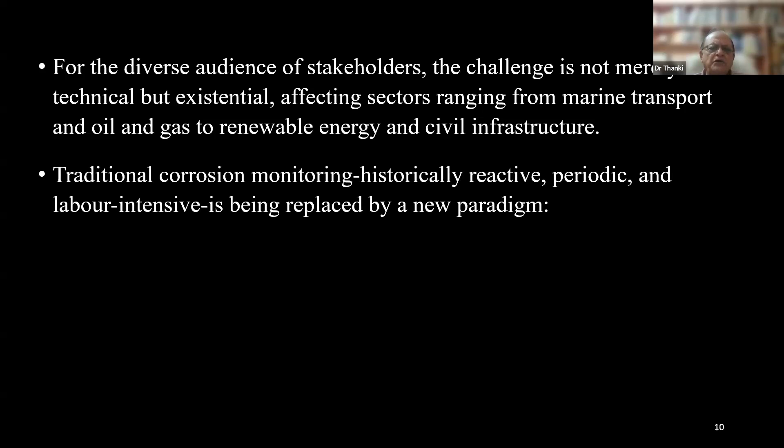The global industrial complex is currently undergoing a structural transformation in asset management, driven by the unsustainable economic and environmental cost of material degradation. Corrosion, often characterized as a silent destroyer of infrastructures, accounts for an estimated $2.5 trillion in annual economic losses globally, representing approximately 3.4% of global gross domestic product. For the diverse audience of stakeholders, the challenge is not merely technical but existential, affecting sectors ranging from marine transport and oil and gas to renewable energy and civil infrastructure. Traditional corrosion monitoring, historically reactive, periodic, and labor intensive, is being replaced by a new paradigm: predictive corrosion resilience.

This approach leverages the current convergence of high fidelity digital twins, DT, and artificial intelligence, AI, to synchronize the physical state of an asset with a virtual counterpart, enabling proactive intervention before catastrophic failures occur.

The global economic and environmental imperative: the financial burden of corrosion translates into maintenance budgets, impacting national security and global sustainability goals. Research conducted by the Association for Materials Protection and Performance indicates that between 15 and 35% of corrosion cost, equating to as much as $875 billion annually, are preventable through the application of currently available and emerging corrosion control practices.

In high stakes environments such as the Gulf of Mexico, equipment failures due to corrosion represent an annual cost of approximately $2 billion. For water infrastructures in North America, corrosion contributes to over 260,000 pipe failures annually, adding $2.6 billion in repair costs to municipal budgets.

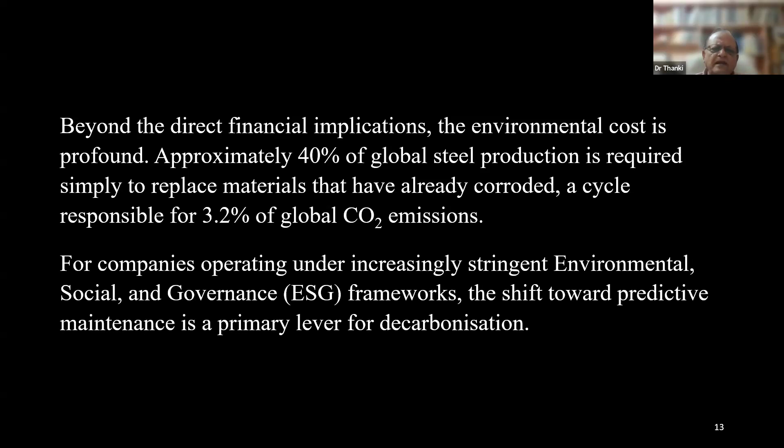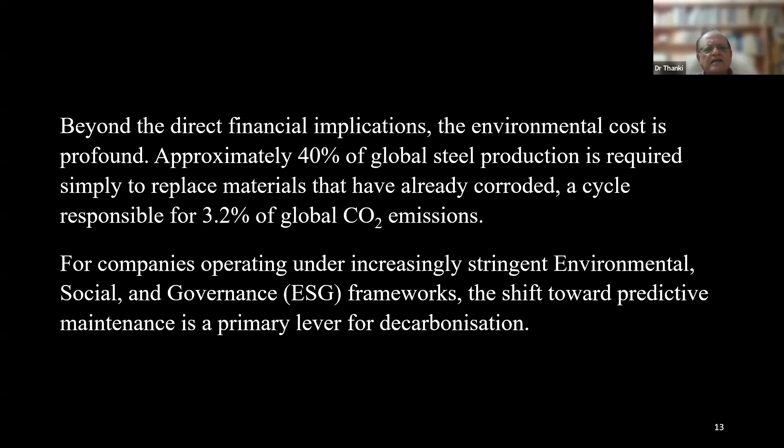Beyond the direct financial implications, the environmental cost is profound. Approximately 40% of global steel production is required simply to replace materials that have already corroded, a cycle responsible for 3.2% of global CO2 emissions. For companies operating under increasingly stringent Environmental, Social, and Governance (ESG) frameworks, the shift toward predictive maintenance is a primary lever for decarbonization.

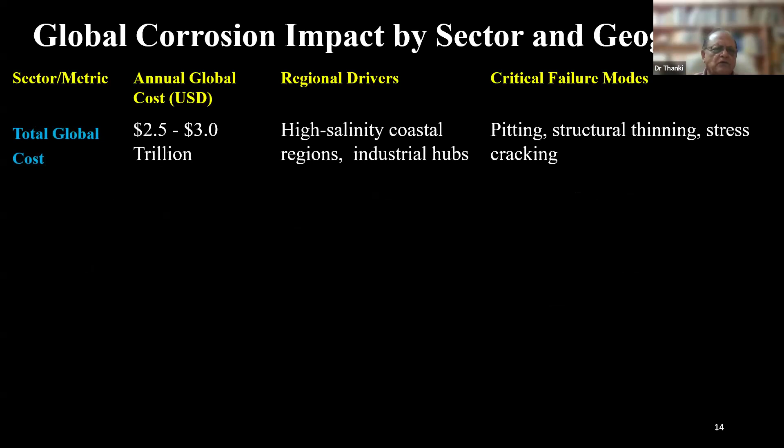Now I've tried to give you one tabulation on this global corrosion impact by sector and geography. We'll be making the table with sector, annual global cost, regional drivers, and critical failure modes. Total global cost: 2.5 to 3 trillion dollars. Regional drivers are high salinity coastal regions and industrial hubs, with characteristics like pitting, structure thinning, and stress cracking. This shows the critical failure modes by sector.

Oil and gas: 1.37 billion direct, Middle East with 32.5% market share, and Gulf of Mexico. The failure modes are sweet CO2, sour H2S, and microbial MIC.

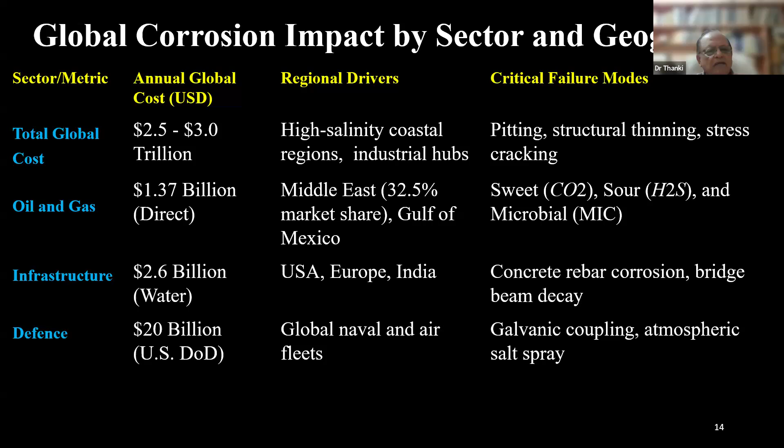Infrastructure: 2.6 billion through water alone. Regional drivers are USA, Europe, and India, with concrete rebar corrosion and bridge beam decay. Defense: 20 billion US dollars by US DoD, covering global naval and air fleets, with critical failure modes including galvanic coupling and atmospheric salt spray. Environmentally, this represents 3.2% of global carbon dioxide through the global steel replacement cycle, early coating failure, and leak-induced spills.

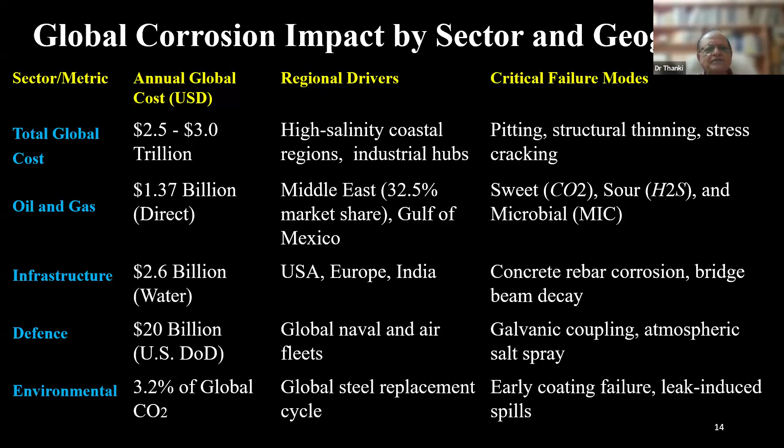Let us see the strategic roadmap to predictive resilience, how it works. The transition from a no-twin state to a fully autonomous, self-healing infrastructure requires a structured progression through levels of technological and organizational maturity. This roadmap provides a framework for organizations to evaluate their current standing and plan for a phased integration of AI and digital twin technologies.

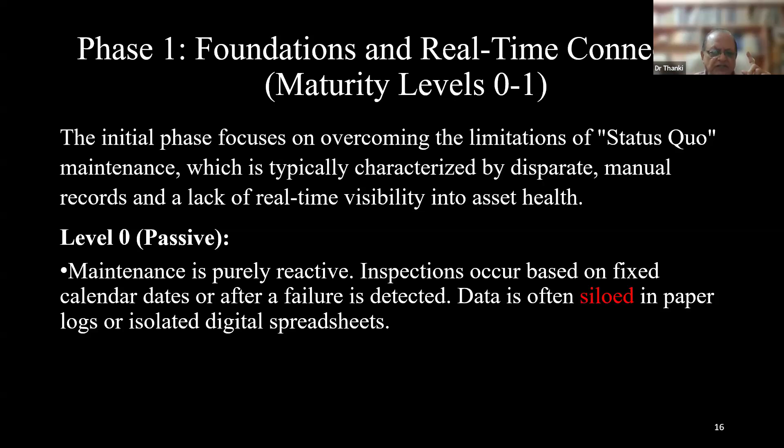Let us start with level 0, that is passive. Maintenance is purely reactive; inspections occur based on fixed calendar dates or after a failure is detected. Data is often siloed in paper logs or isolated digital spreadsheets. Level 1 is startup: organizations begin the twin transition by deploying Internet of Things sensors. This level focuses on real-time data capture and basic visualization.

Operators gain a dashboard view of parameters like pressure, temperature, and current wall thickness, but analytics are limited to simple threshold alerts.

Phase 2, contextualization and prediction. That is what we call maturity level 2 and 3. In the second phase, the digital twin evolves from a simple monitoring tool into a sophisticated forecasting engine by integrating historical context and advanced physics-based models.

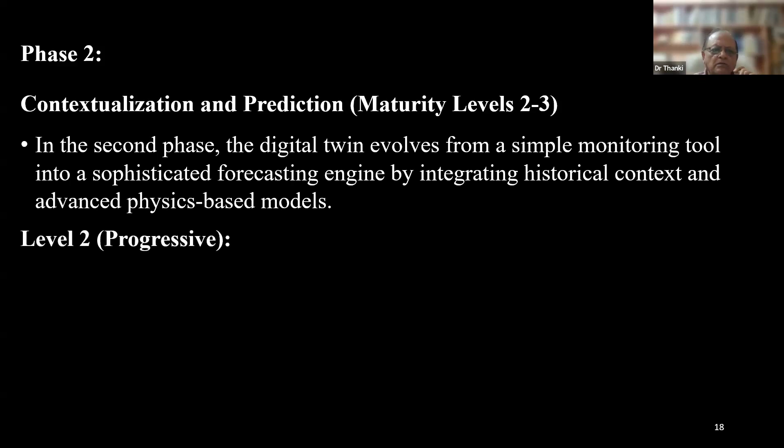Level 2 is progressive. The twin incorporates historical inspection records and normative benchmarking. By comparing current sensor data to years of maintenance history, the system can identify deviations from the normal degradation curves.

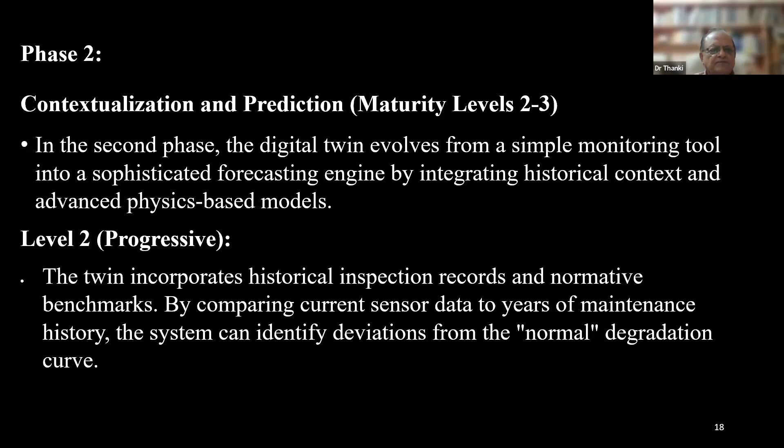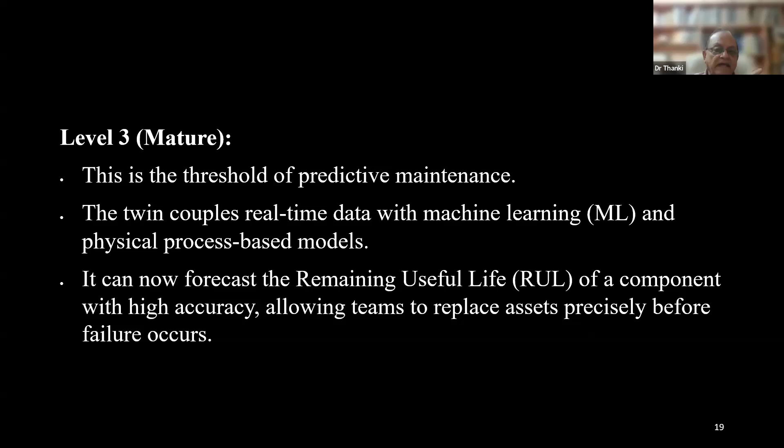Level 3, this is the threshold of predictive maintenance. The twin couples real-time data with machine learning and physical process-based models. It can now forecast the remaining useful life, RUL, of a component with high accuracy, allowing teams to replace assets precisely before failure occurs.

Phase 3, optimization and autonomy, maturity level 4 and 5. The final phase leverages the full power of AI, not only to predict the future, but also to optimize operations and maintenance strategies actively. Then comes level 4, optimization.

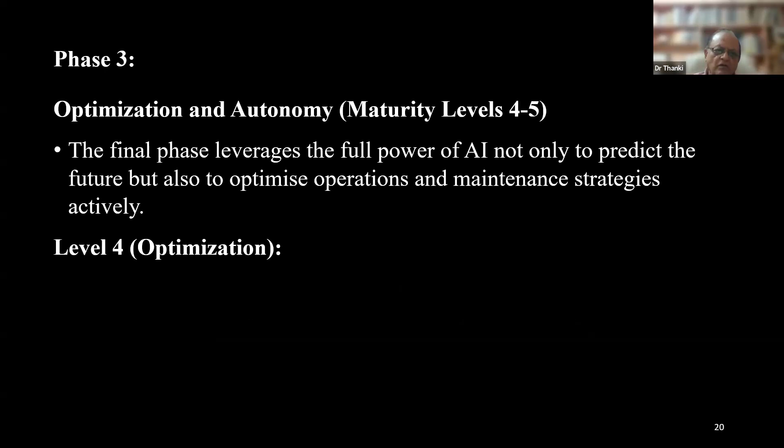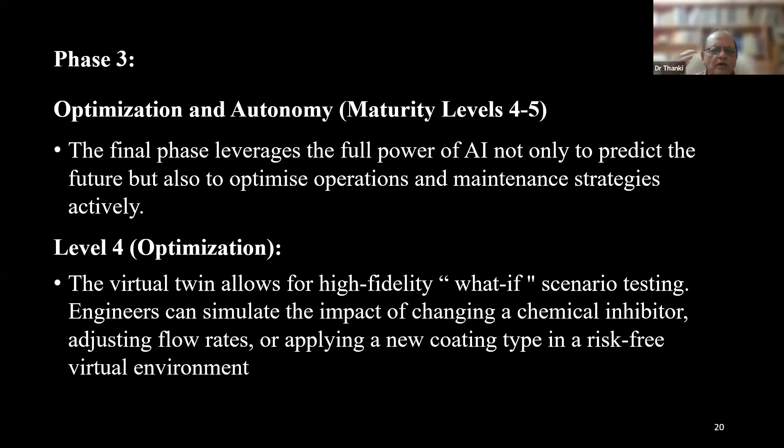The virtual twin allows for high fidelity what-if scenario testing. Engineers can simulate the impact of changing chemical inhibitors, adjusting flow rates, or applying a new coating type in a risk-free virtual environment.

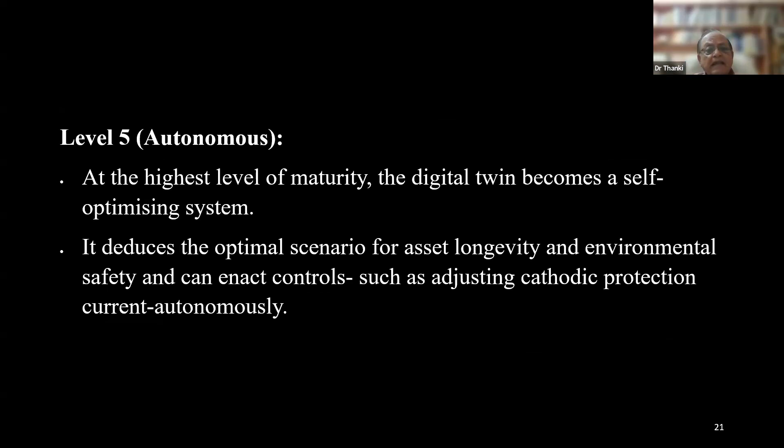And level 5, we are reaching autonomous. At the highest level of maturity, the digital twin becomes a self-optimizing system. It deduces the optimal scenario for asset longevity and environmental safety, and can enact controls such as adjusting cathodic protection current autonomously.

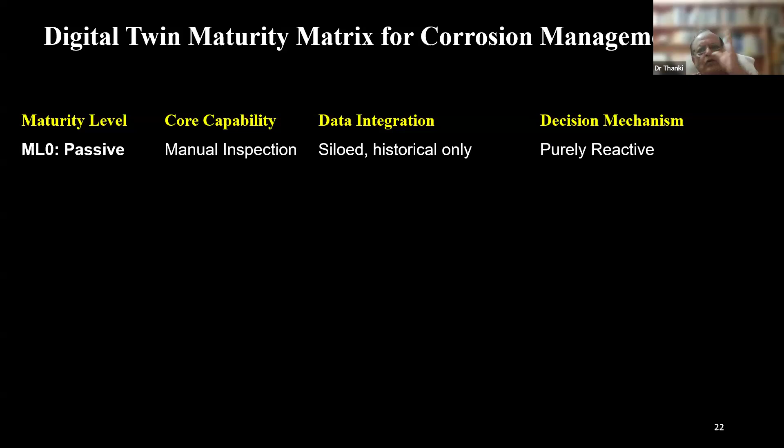Let us have the overview of all the systems. ML0, passive, manual inspection, siloed, historical only. It's a purely reactive one. Then we raise to number 1, the starter: real-time monitoring, IoT sensor streams, descriptive and alert-based.

The third, progressive, has historical context along with it. Data integration comes with IoT plus past maintenance logs and history. Then the decision mechanism is diagnostic and trend analysis.

Then comes the maturity level: predictive forecasting, multi-modal data plus AI models, and prognostic and RUL calculation. Optimized scenario simulation: virtual what-ifs testing and prescriptive optimization. And then last comes master: autonomous action, closed loop self-correction, and AI-driven direct control.

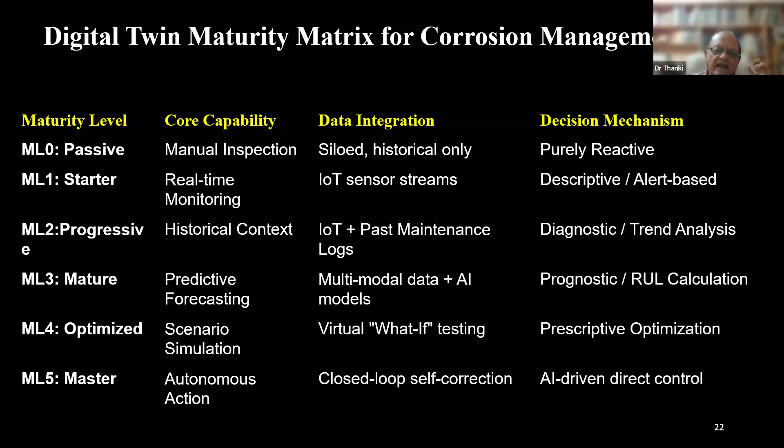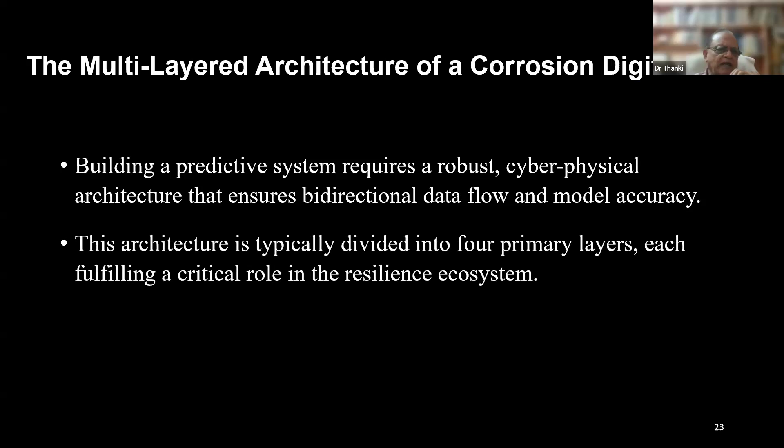Building a predictive system requires a robust cyber-physical architecture that ensures bi-directional data flow and model accuracy. This architecture is typically divided into 4 primary layers, each fulfilling a critical role in the resilience ecosystem. The physical asset and sensor layer.

The foundation is the physical infrastructure, whether it be a section of a subsea pipeline, a wind turbine tower, or a coastal bridge. This layer is embedded with diverse sensors that act as the eyes and ears of the system.

Then comes the corrosion coupon, physical metal strips inserted into the environment that mimic the asset's material, providing ground truth calibration for the digital models.

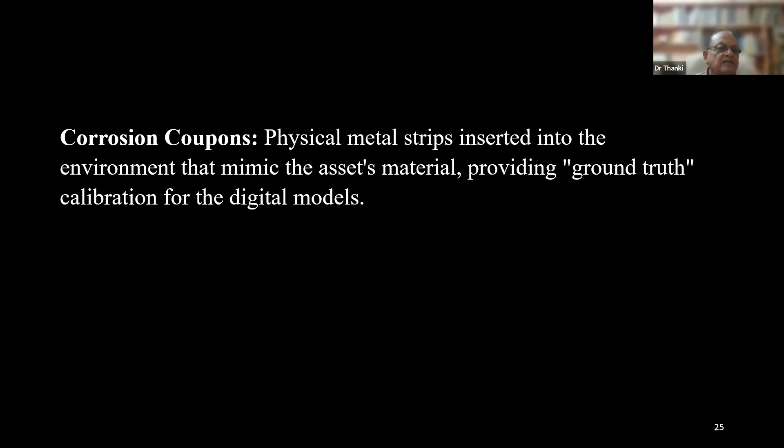Environment sensors track ambient conditions such as humidity, temperature, pH, and the concentration of corrosive species like chlorides or hydrogen sulfide.

Now let us come back again to DAML. The DAML acts as the bridge between the physical and virtual world. It handles the transmission, processing, and organization of vast amounts of data generated by the sensor layer. Key challenges in this layer include managing data quality, ensuring timely transmission over network infrastructure, and implementing security protocols to protect critical infrastructure data from cyber threats.

The multi-model AI and simulation layer. This is the computational engine of the digital twin. It integrates ultra high fidelity simulation models with data-driven AI algorithms to mirror the structural behavior of the asset.

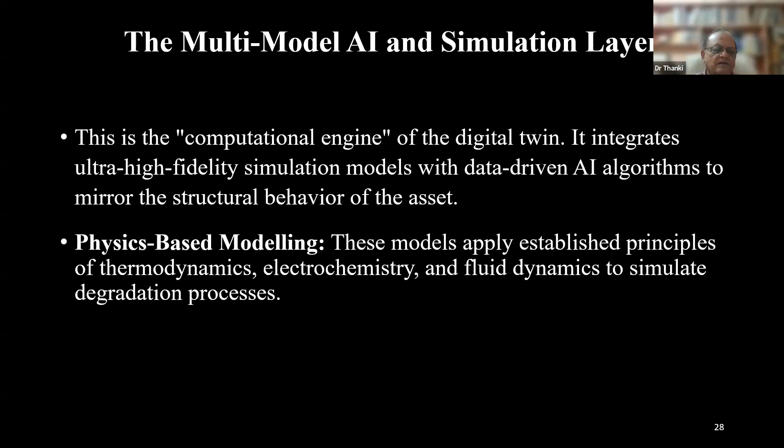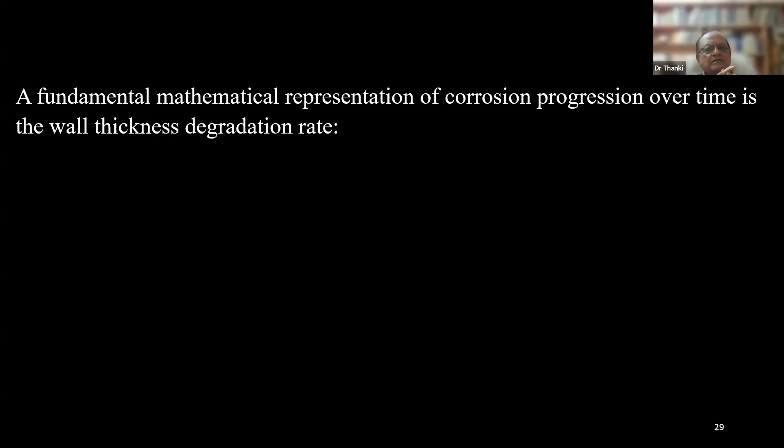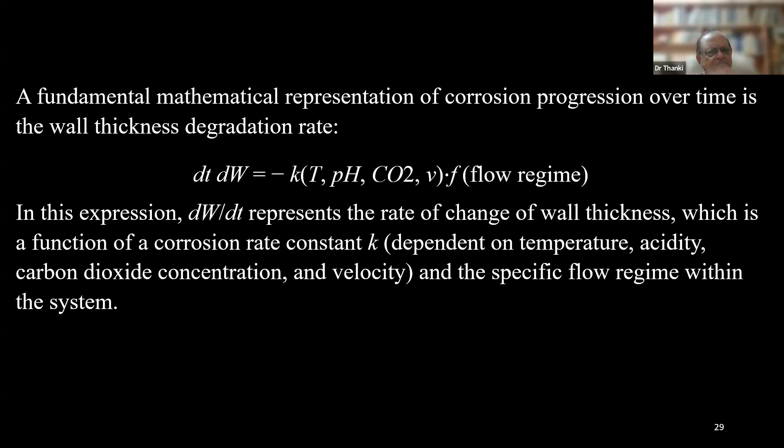Physics-based modeling: these models apply established principles of thermodynamics, electrochemistry, and fluid dynamics to simulate degradation processes. A fundamental mathematical representation of corrosion progression over time is the wall thickness degradation rate. For example, this is the way we can consider it: dW by dt represents the rate of change of wall thickness, which is a function of the corrosion rate constant K, depending on temperature, acidity, carbon dioxide concentration, velocity, etc., and the specific flow regime within the system.

Now let us see how the AI and machine learning modality comes into play. AI complements physics models by identifying non-linear patterns and anomalies in complex datasets that theoretical equations might fail to capture.

Let us look at computer vision. Algorithms like YOLO, known as you only look once, or CNNs, convolutional neural networks, are used to analyze drone and robotic imagery for rust detection, pitting identification, and coating degradation, often achieving over 90% accuracy in defect localization. It's a wonderful thing.

Time series forecasting. Recurrent neural networks, known as RNNs, and long short-term memory networks are employed to predict future corrosion rates based on historical environmental fluctuations.

Let us break this down in everyday language. The problem, for example, is we want to predict how fast metal will corrode or rust in the future. Rusting depends on things like temperature, humidity, and pollution levels, which change over time. The idea is if we look at past environment data, like yesterday's humidity, last week's temperature, last month's rainfall, we might spot patterns, and those patterns can help us guess what the corrosion rate will be tomorrow or next year.

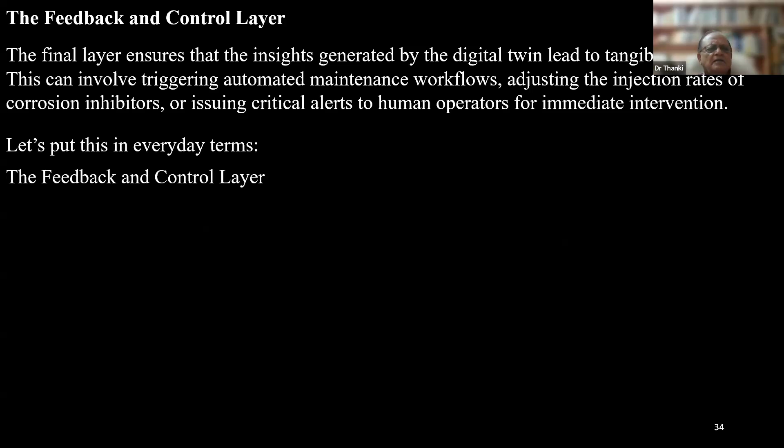Think of the digital twin, a virtual copy of a real machine or system, as a smart advisor. It doesn't just study and predict; it also makes sure those predictions lead to real world action. Let us see an everyday analogy.

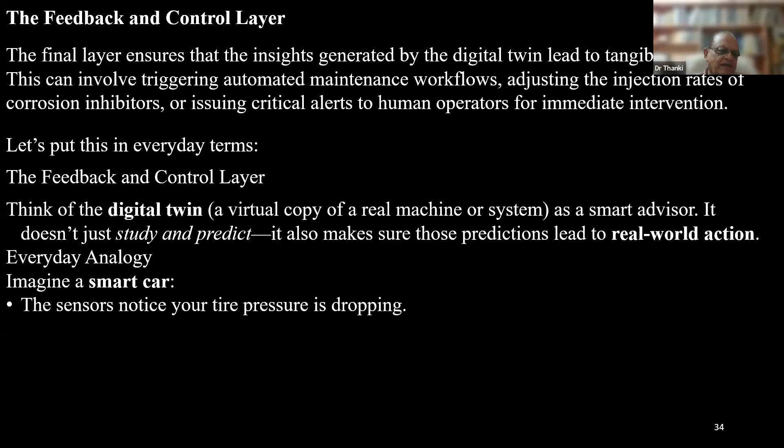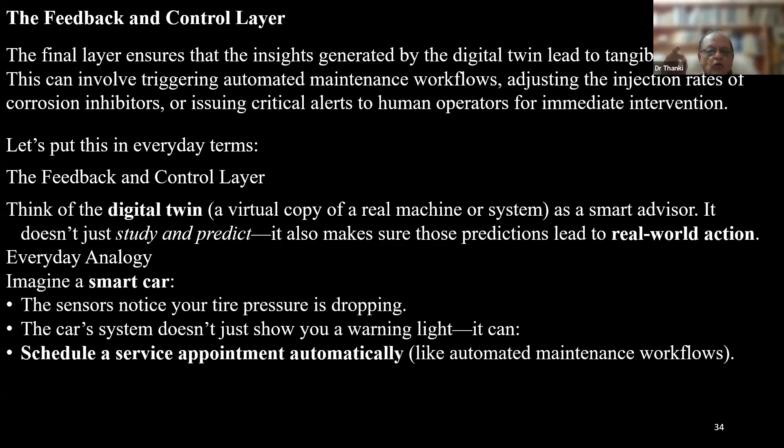Imagine a smart car and how it functions. The sensors notice your tire pressure is dropping. The car system does not just show you a warning light. It can schedule a service appointment automatically, like automated maintenance workflows, and adjust how the car drives to reduce strain on the tires, like adjusting corrosion inhibitor injection rates.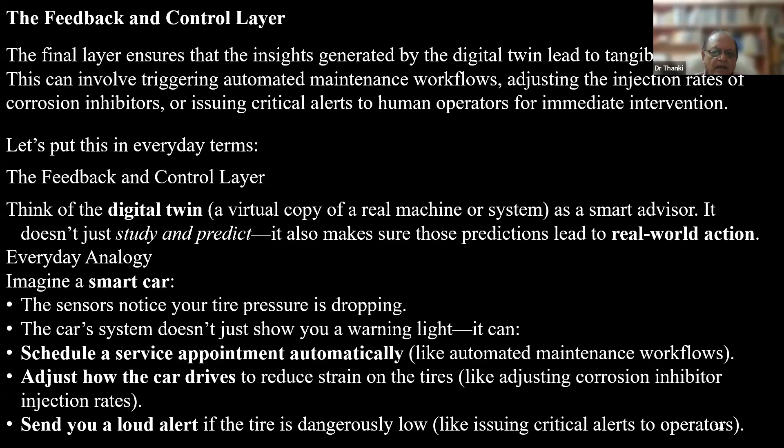So in this vehicle image, it sends you a loud alert if the tire is dangerously low, like issuing critical alerts to operators. Why does this matter? Without this layer, the digital twin would just be a thinker that produces insights but never acts. With the feedback and control layer, it becomes a doer, turning knowledge into practical steps that protect equipment and keep people safe. In short, the feedback and control layer makes sure predictions don't just sit in a report, they trigger real actions like repairs, adjustments, or alerts.

Now let us go with the regional challenges which I try to dig out. The effectiveness of a predictive roadmap depends heavily on its ability to account for the unique environmental stressors present in the participating countries. Corrosion mechanisms are highly sensitive to local climate variables, which the digital twin must ingest as primary input parameters.

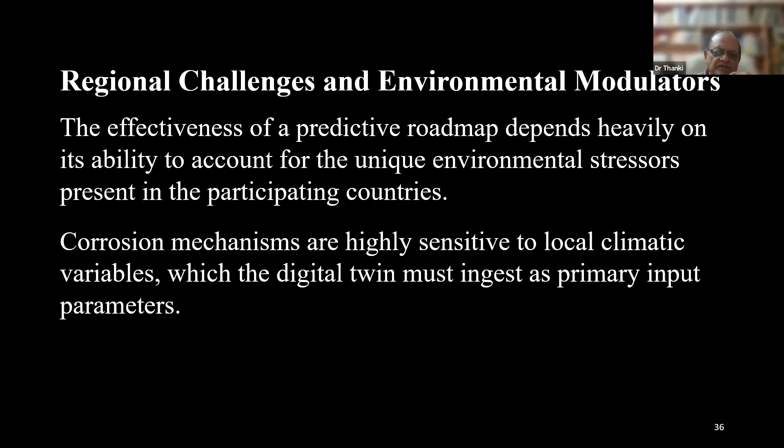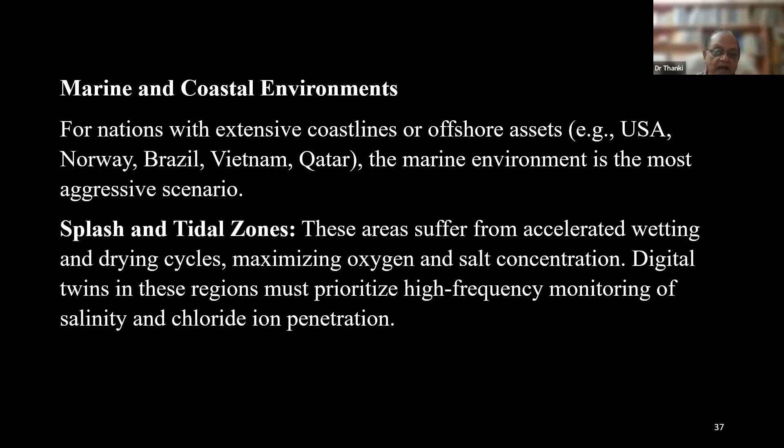I will take an example of marine and coastal environments. For nations with extensive coastlines or offshore assets, for example USA, Norway, Brazil, Vietnam, Qatar, the marine environment is the most aggressive scenario. Splash and tidal zones suffer from accelerated wetting and drying cycles, maximizing oxygen and salt concentration. Digital twins in these regions must prioritize high frequency monitoring of salinity and chloride ion penetration.

Another factor is biofouling, the accumulation of marine organisms, which can create anaerobic microenvironments, favoring localized pitting and corrosion under deposits. AI models are particularly useful here for analyzing underwater visual data to detect early biofilm formation.

Sargassum and hydrogen sulfide: recent seaweed decomposition events in the Caribbean and French West Indies have introduced H2S, hydrogen sulfide, into the atmosphere, creating highly corrosive environments for copper and zinc infrastructure that traditional models were not designed to handle.

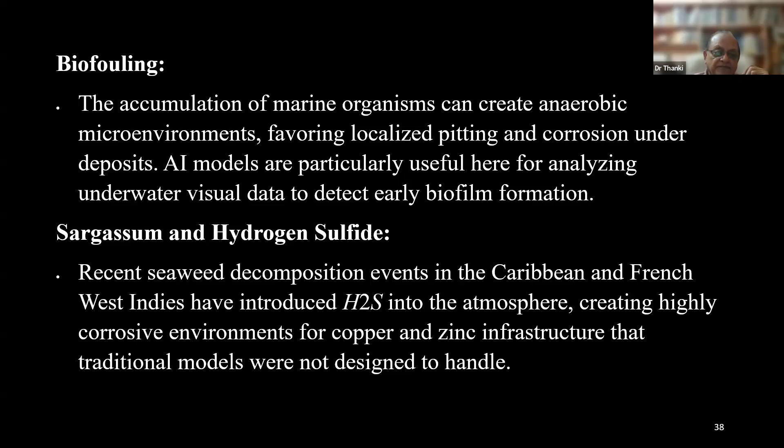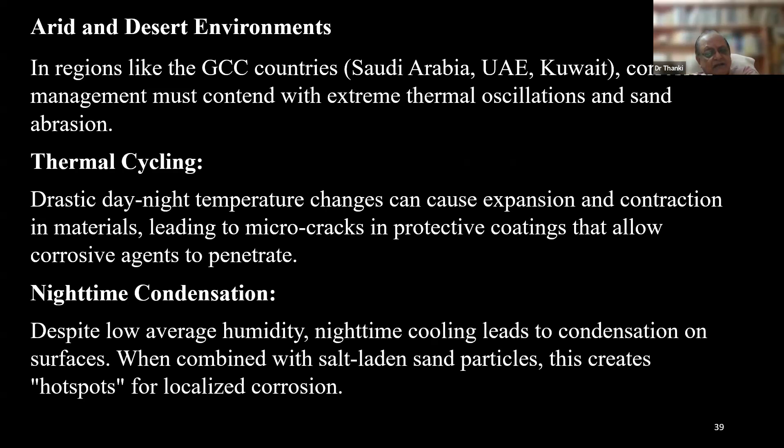Arid and desert environments: in regions like the GCC countries such as Saudi Arabia, UAE, and Kuwait, corrosion management must contend with extreme thermal oscillations and sand abrasion. Thermal cycling, drastic day-night temperature changes, can cause expansion and contraction in materials, leading to microcracks in protective coatings that allow corrosive agents to penetrate. Nighttime condensation: despite low average humidity, nighttime cooling leads to condensation on surfaces. Combined with salt-laden sand particles, this creates hotspots for localized corrosion.

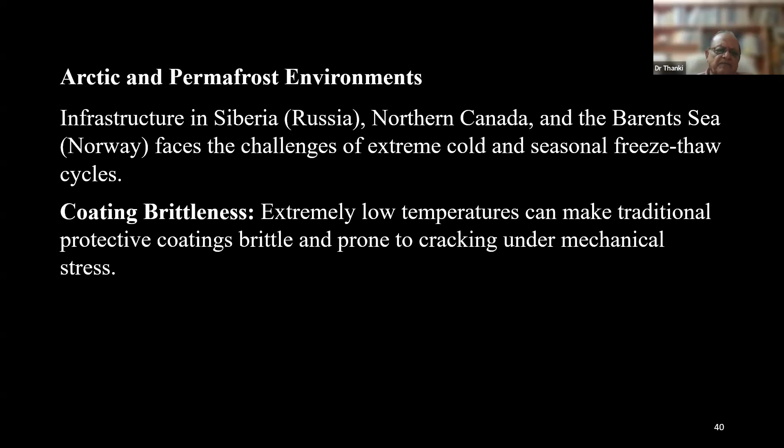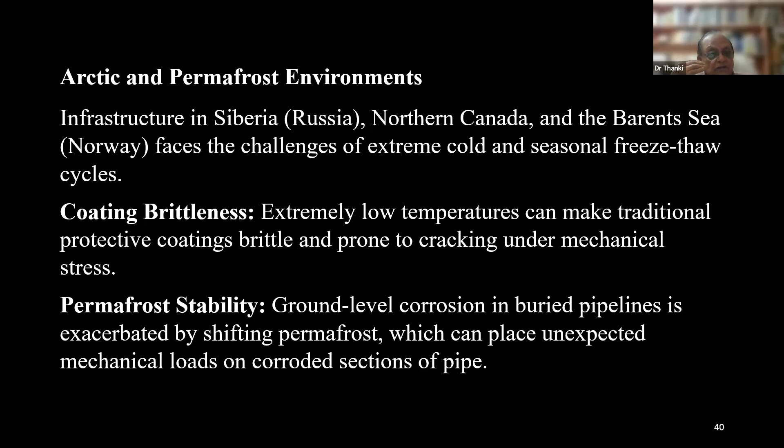Arctic and permafrost environments: infrastructure in Siberia, Russia, northern Canada, and the Barents Sea like Norway faces the challenges of extreme cold and seasonal freeze-thaw cycles. Coating brittleness: extremely low temperatures can make traditional protective coatings brittle and prone to cracking under mechanical stress. Permafrost stability: ground level corrosion in buried pipelines is exacerbated by shifting permafrost, which can place unexpected mechanical loads on corroded sections of pipe.

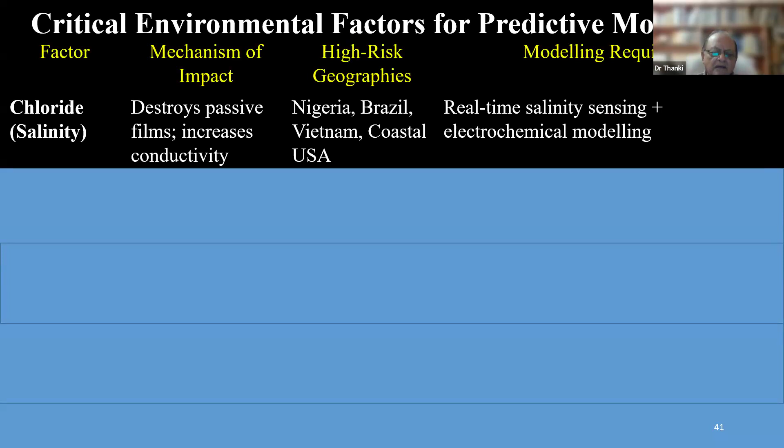Temperature accelerates electrochemical reaction kinetics. Saudi Arabia, UAE, India, and Egypt are prone to these temperature variations. So Arrhenius-based kinetics integration in digital twin is needed.

Then H2S and CO2 cause sweet and sour corrosion embrittlement. Iraq, Kuwait, Qatar, and Argentina are the high risk areas in the world. Gas concentration monitoring plus metallurgical simulation is the model required in this section.

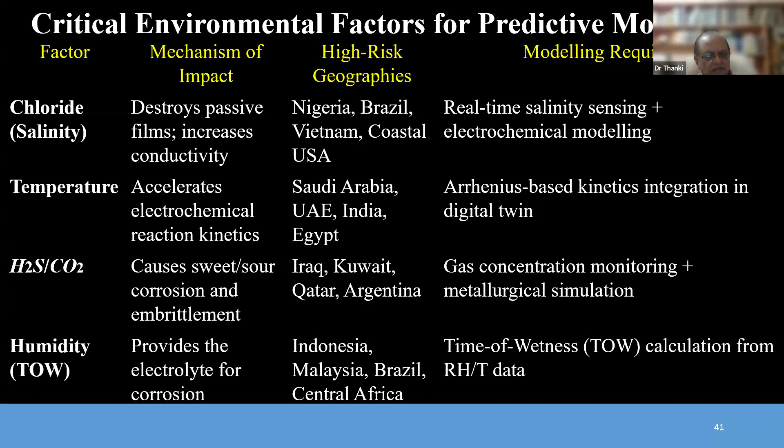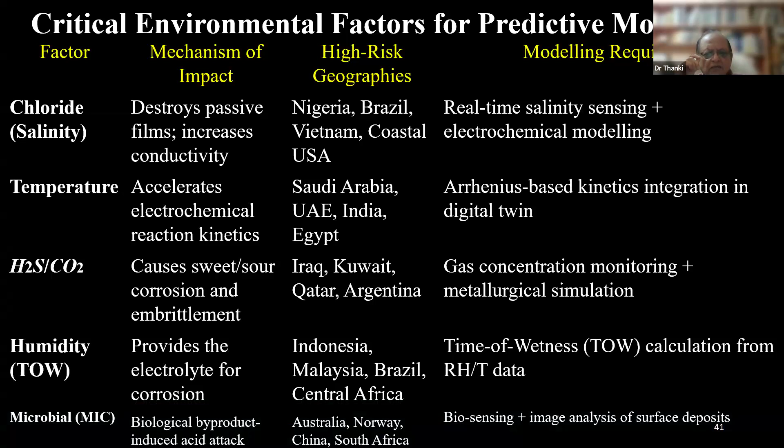Let us see the economics, the ROI. The adoption of AI and digital twin technologies is increasingly driven by a compelling business case with measurable improvements across financial and operational KPIs, for asset-intensive industries like energy and utilities, oil and gas, mining and metals, telecommunications, transportation and aviation, and manufacturing.

In short, maintenance is no longer just about fixing things. It is about measurable resilience, meaning proving with data that your maintenance strategy strengthens the organization's ability to endure, adapt, and thrive under stress. It's about turning resilience into a performance indicator, not just a vague aspiration. It's really mind-boggling what we are experiencing.

Financial performance indicators, average ROI: let us see. Clients implementing digital twins for gas distribution networks report an average ROI of 250% within the first year. Here is how those impressive ROI and cost reduction results happen when gas distribution networks adopt digital twin technology.

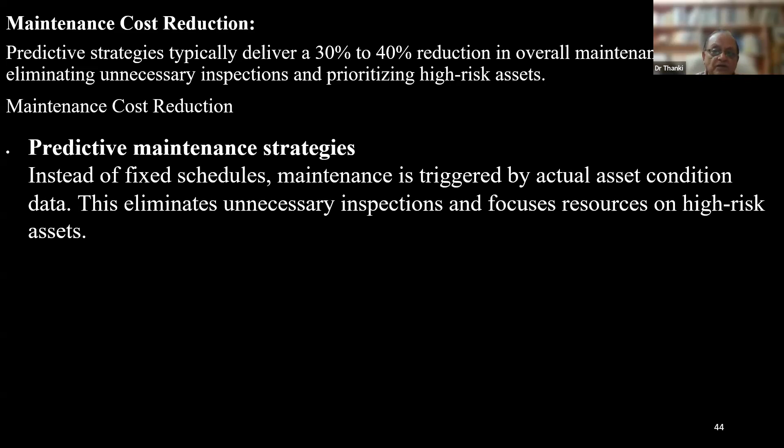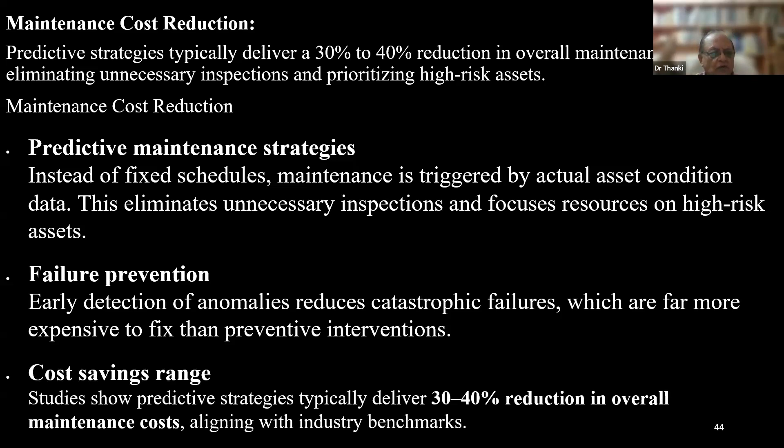Emergency repair avoidance. AI-powered failure prevention with up to 95% accuracy can reduce emergency repair expenses by up to 70%. That's a powerful statement. It highlights how predictive AI can transform maintenance strategy.

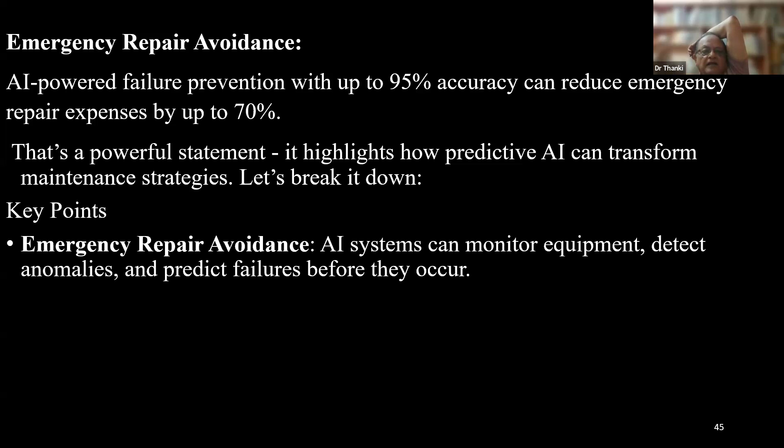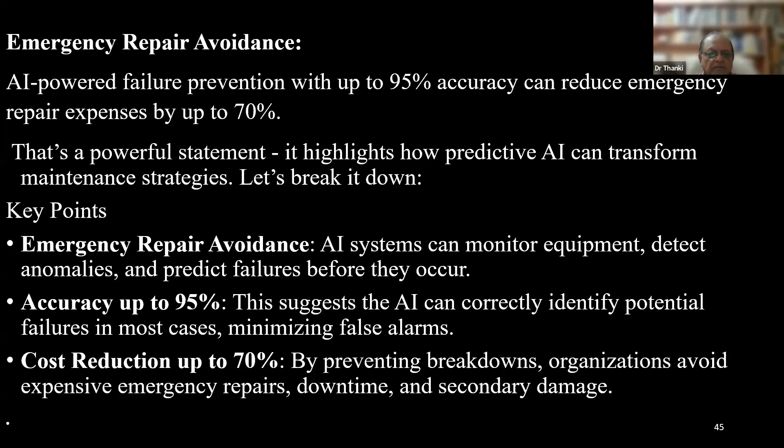So let us break it down. Key points: emergency repair avoidance. AI systems can monitor equipment, detect anomalies, and predict failures before they occur. Accuracy up to 95% suggests the AI can correctly identify potential failures in most cases, minimizing false alarms. Cost reduction up to 70%: by preventing breakdowns, organizations avoid expensive emergency repairs, downtime, and secondary damage.

Asset life extension. Data-driven replacement planning and optimal intervention timing can extend the useful life of critical infrastructure by 25%. Here is how that concept plays out. Using data analytics, organizations can plan replacements and interventions more intelligently. Instead of replacing too early, wasting useful life, or too late, risking failure, AI pinpoints the best moment for action. That's 25% longer use, extending the lifespan of critical infrastructure, reducing capital expenditure, and delaying costly replacements.

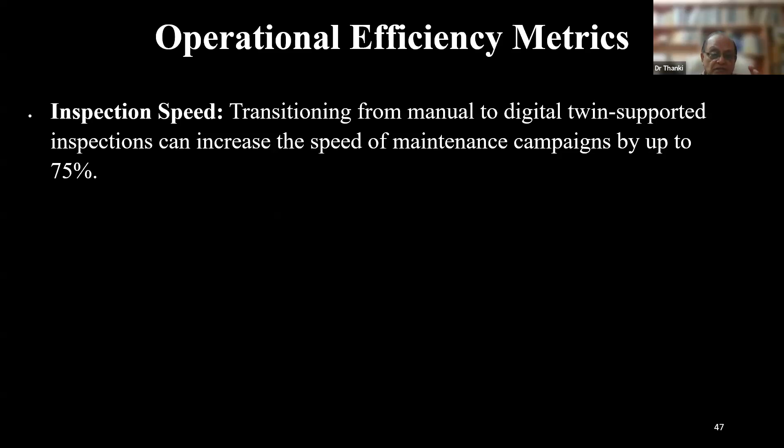Now let us see the OEM, operational efficiency metrics. Transitioning from manual to digital twin supported inspections can increase the speed of maintenance campaigns by up to 75%.

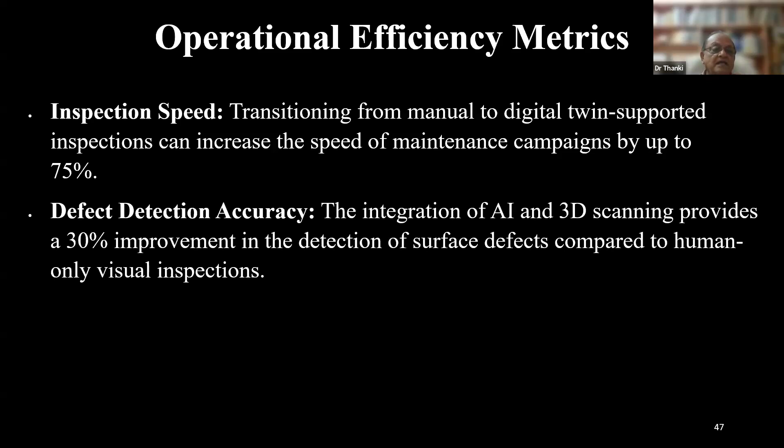Defect detection accuracy: the integration of AI and 3D scanning provides a 30% improvement in the detection of surface defects compared to human-only visual inspections.

Downtime reduction: real-time visibility and scenario modeling minimize unscheduled outages, which for an oil platform can represent millions of dollars in lost production per day.

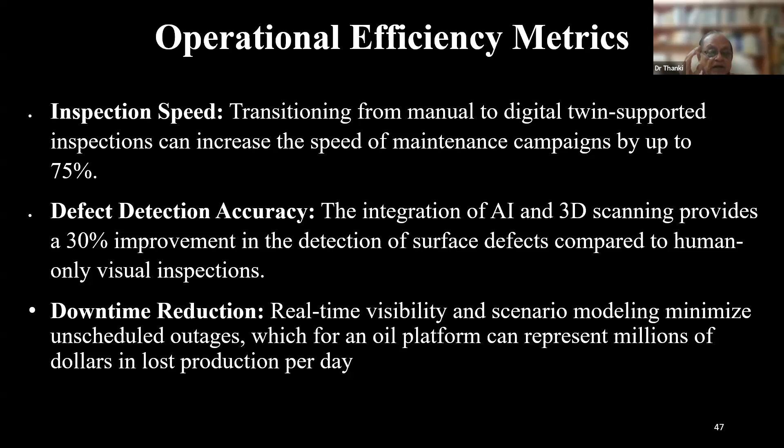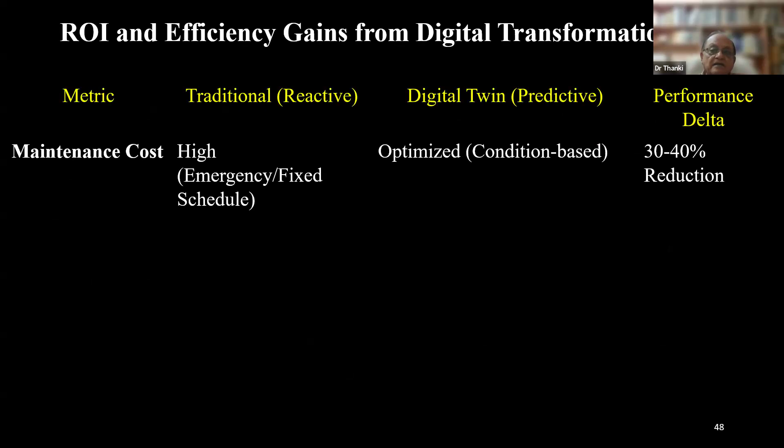You have performance improvement of 60%. Inspection time: weeks and months manually, versus digital twin, automated and robotic, 75% faster. Energy use: inefficient due to degradation, optimized via health monitoring and performance data, giving 10 to 20% savings in energy. It's a big figure.

Let us talk about ESG impact and corporate sustainability. In the modern industrial environment, sustainability means not wasting resources and keeping the planet healthy. It is no longer merely a reporting function; it has become a fundamental data and AI challenge.

Predictive corrosion management is a primary contributor to corporate decarbonization and environmental stewardship goals. In today's factories and plants, being green is not just about filing paperwork or checking boxes anymore. It has become a high-tech job that requires using computers and smart tech to solve big problems. One of the best ways a company can protect the planet is by predicting when pipes and machines will rust before it actually happens. By fixing things early, companies stop leaks, save energy, and prevent big accidents that hurt the environment.

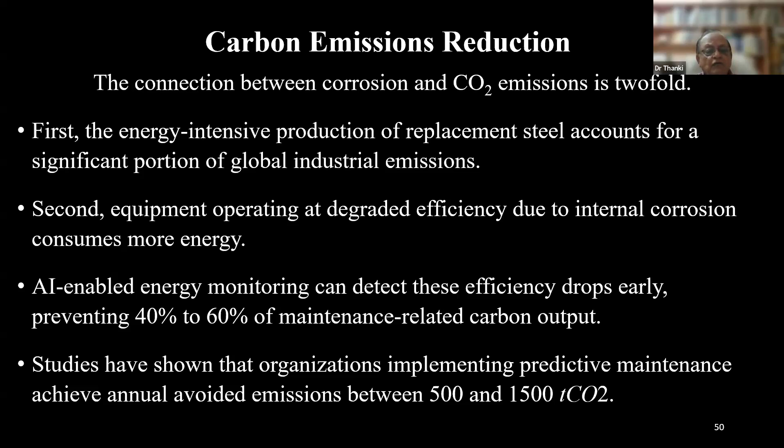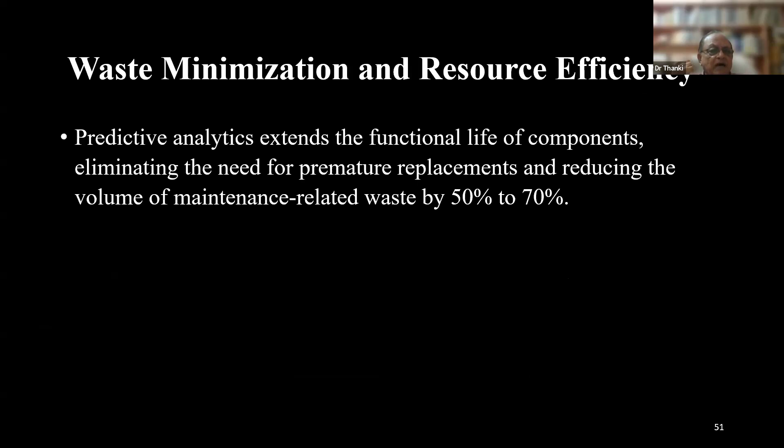It also helps with waste minimization and resource efficiency. Predictive analytics extends the functional life of components, eliminating the need for premature replacement and reducing the volume of maintenance-related waste by 50 to 70%. Furthermore, by preventing leaks and ruptures, these systems reduce the risk of catastrophic environmental accidents such as oil spills or chemical leaks, which incur massive remediation costs and ecological damage.

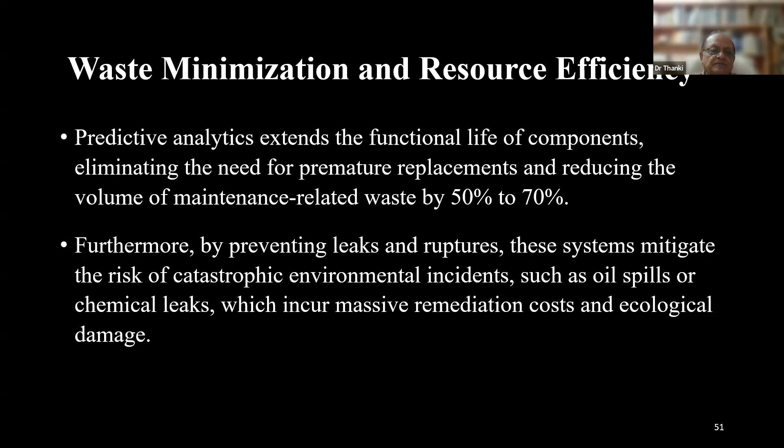Let us discuss automated ESG compliance. How? Digital twins provide a transparent, auditable trail of an asset's health and environmental performance. Like this, organizations can leverage autonomous data pipelines to automate ESG reporting, improving reporting accuracy by 95 to 99% while significantly reducing the manual workload for compliance teams.

This is a very important criteria which touches upon standards, governance, and interoperability. For a global audience like us, the successful implementation of predictive resilience relies on a unified framework for data exchange and system interoperability. The absence of standardization has historically led to confusion and hindered widespread adoption.

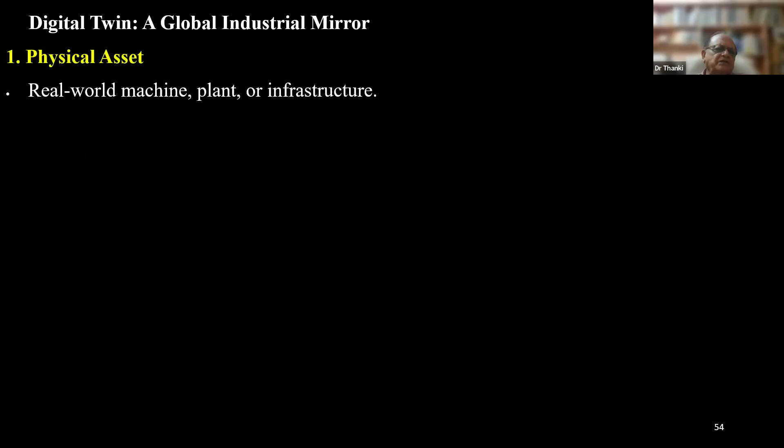Digital twin, a global industrial mirror. I will show you how it is. Physical asset: real world machine, plant or infrastructure. For example, pump, turbine, pipeline, or entire facility.

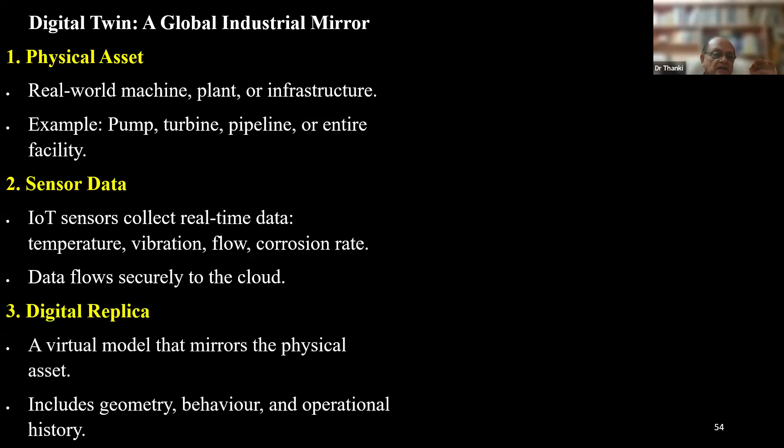Sensor data: IoT sensors collect real-time data - temperature, vibration, flow, corrosion rate. Data flows securely to the cloud, so it remains untouchable afterwards. Digital replica: a virtual model that mirrors the physical asset, includes geometry, behavior, and operational history.

Fourth comes analytics and simulation: predictive maintenance, stress testing, life cycle forecasting. AI and machine learning enhance decision making. Actionable insights, a very important criteria.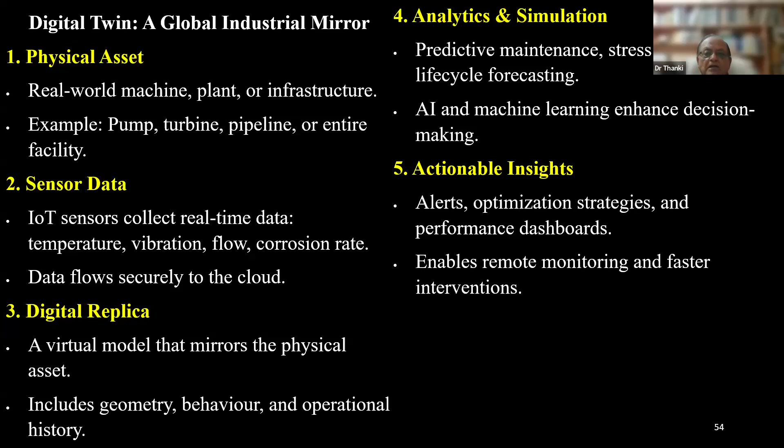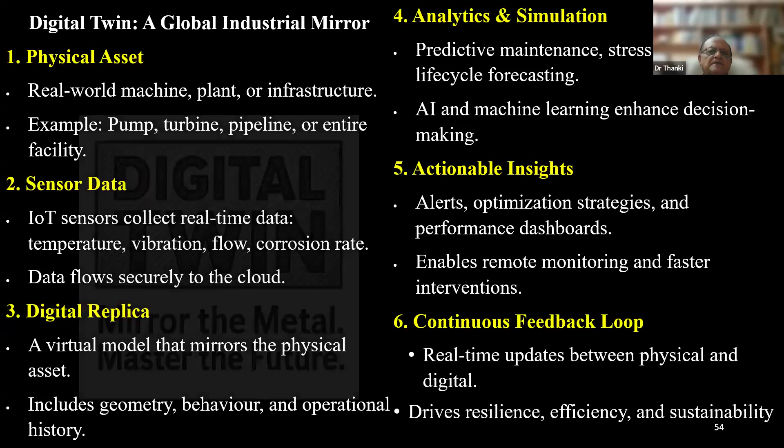Alerts, optimization strategies, and performance dashboards enable remote monitoring and faster intervention, and continuous real-time updates between physical and digital. So this has resilience, efficiency, and sustainability. Digital twin mirrors the metal and masters the future.

Here is the digital twin with all the 6 steps. You know now what we discussed just now. I have just shown you the visual only.

The ISO 23247 framework provides a standardized approach for the creation and management of digital twins in manufacturing. Its architecture is divided into the physical layer, the digital layer, and the integration layer. That means secure bidirectional connectivity.

Adopting ISO 23247 compliant systems ensures that an organization can integrate diverse sensor technologies and AI performance without being locked into a single vendor's ecosystem. I'm just trying to give you this vision.

First, the physical layer, down below. The real world manufacturing environment includes machines, sensors, operators, and production lines. This is where data originates from vibration sensors, temperature gauges, corrosion monitors, etc.

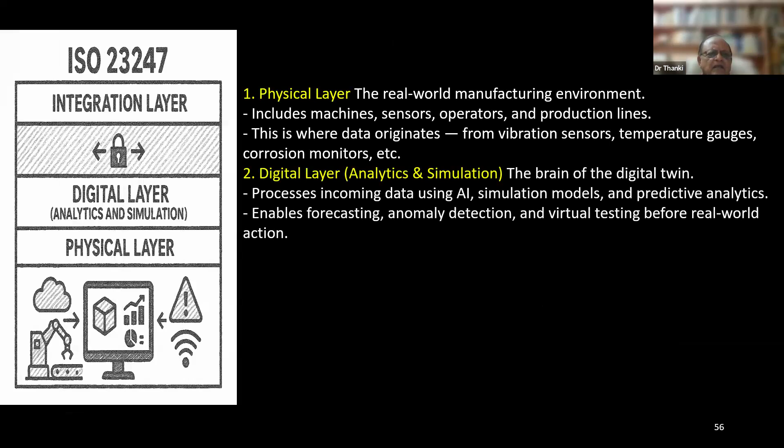Next comes the digital layer, the analytics and simulation - the brain of the digital twin. It processes incoming data using AI, simulation models, and predictive analytics, and enables forecasting, anomaly detection, and virtual testing before real-world actions.

And third comes the integration layer, the bridge. It ensures secure bidirectional data flow using standardized protocols, allows interoperability across platforms, avoiding vendor lock-in.

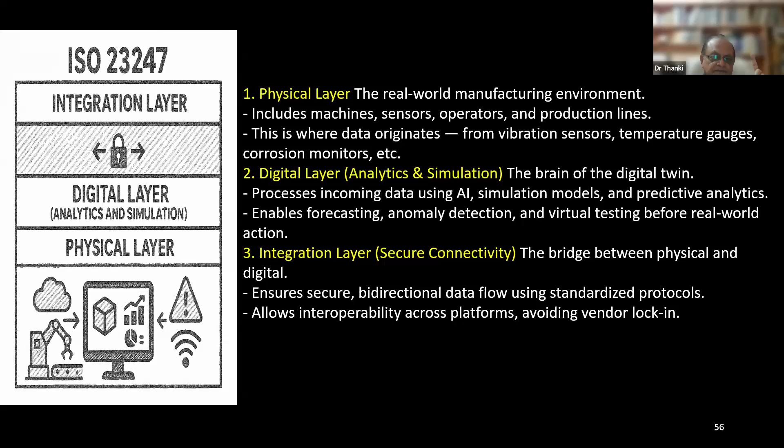This layered structure empowers organizations to build scalable, vendor-neutral digital twin ecosystems. This is a very good thing to be practiced. If anybody is interested, they can definitely approach us.

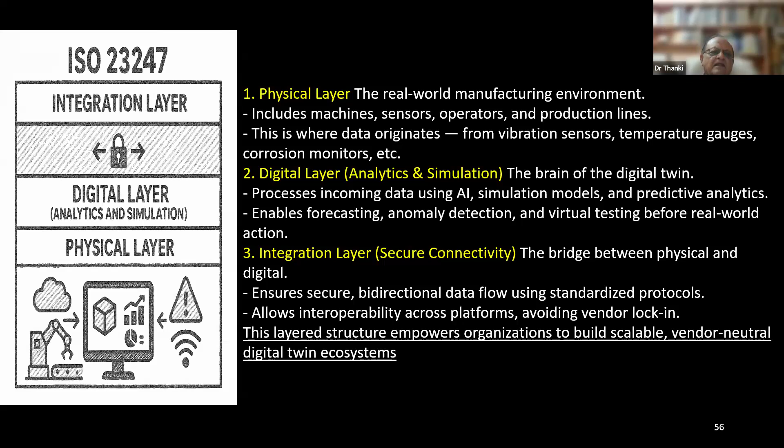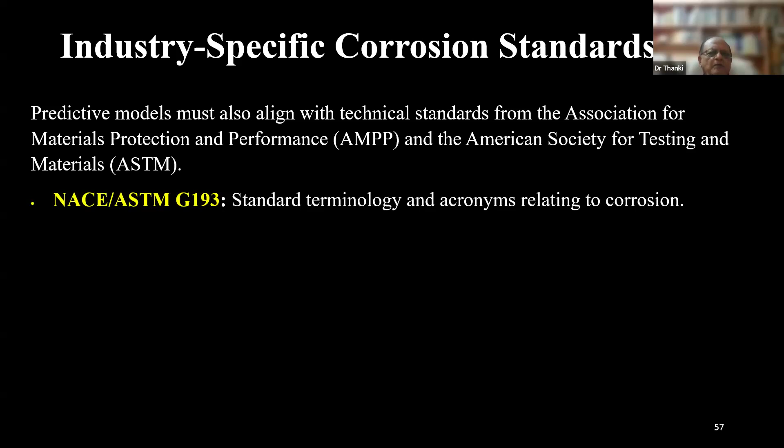Industry-specific corrosion standards: predictive models must also align with the technical standards from the Association for Materials Protection and Performance, previously known as NACE, and the American Society for Testing and Materials. NACE ASTM G193 is standard terminology and acronyms relating to corrosion.

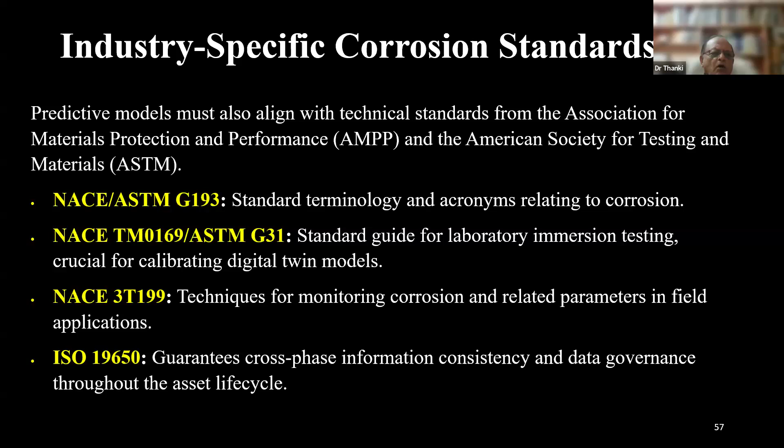NACE TM0169 to ASTM G31 is the standard guide for laboratory immersion testing, crucial for calibrating digital twin models. And NACE 3T199 covers techniques for monitoring corrosion and related parameters in field application. And ISO 19650 guarantees cross-phase information consistency and data governance throughout the asset lifecycle.

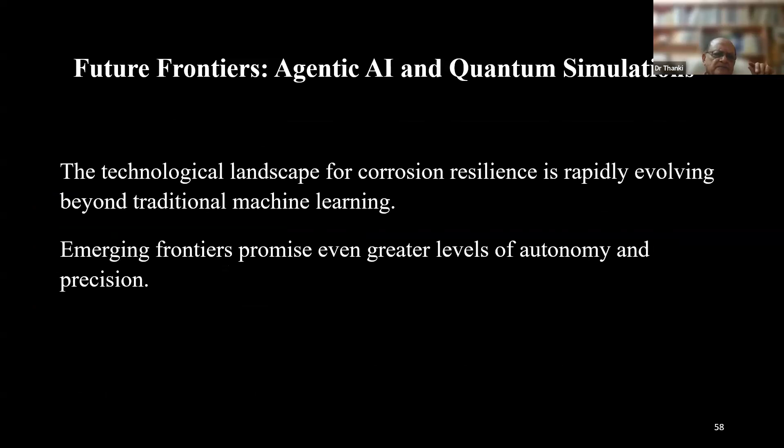Let us see the futures. There are a few slides now to go ahead. Future frontiers: agentic AI and quantum simulation. The technological landscape for corrosion resilience is rapidly evolving beyond traditional machine learning. Emerging frontiers promise even greater levels of autonomy and precision.

It's exhibiting autonomous, goal-directed behavior and decision-making capability. Next generation frameworks are integrating agentic AI - agents capable of autonomous decision-making and negotiation.

In the context of corrosion management, these agents can negotiate contracts for anti-corrosive materials, optimize sourcing cycles, and adapt procurement strategies in real time based on the predicted risk identified by the digital twin. Is it wonderful? It is really a wonderful thing where we will be a lot supported by such a system. Really, we get lost in such type of negotiation area.

Multimodal AI and self-healing systems. The intelligent integration of multimodal AI allows systems to simultaneously process sensor streams, visual inspection data, and textual supplier documents. This provides a holistic insight into material performance that was previously impossible.

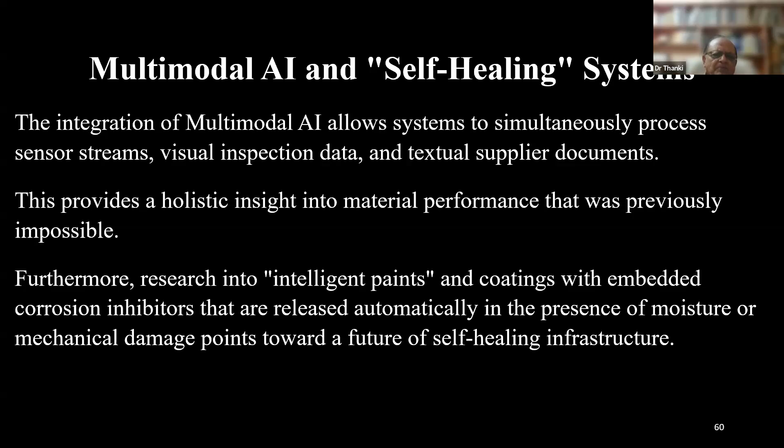Furthermore, research into intelligent paints and coatings with embedded corrosion inhibitors that are released automatically in the presence of moisture or mechanical damage points toward a future of self-healing infrastructure.

Quantum AI simulations hold the potential to model the molecular resistance of emerging alloys and coatings under refinery-specific conditions with unprecedented accuracy. This will enable the design of materials tailored to the specific environmental stressors of each geography, be it the hypersaline Persian Gulf or the acidic shale gas reservoir of Argentina.

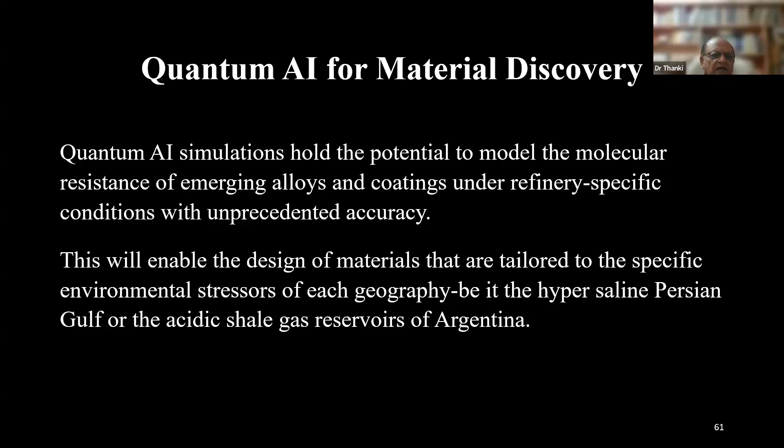For the global community of engineers, managers, and policymakers gathered for this webinar, the transition to predictive corrosion resilience is both an opportunity and a necessity. I am addressing all my international community at the moment.

The evidence demonstrates that leveraging AI and digital twins can reduce operational cost by 30%, extend asset life by 25%, and significantly contribute to global decarbonization efforts. To realize these benefits, organizations must prioritize the following strategic actions.

This is only 2 slides now to go. First is assess maturity: use the digital twin maturity model to identify current gaps in data acquisition and modeling capabilities.

Second, standardize data. Adopt ISO 23247 and ISO 19650 frameworks to ensure scalability and interoperability across global portfolios.

Third, integrate physics and AI. Move beyond simple black box AI models by integrating established corrosion kinetics and physics-based simulations into the digital twin. Tailor to the environment by incorporating local climatic modulators such as time of wetness, salinity, and gas concentration as core input parameters for predictive models.

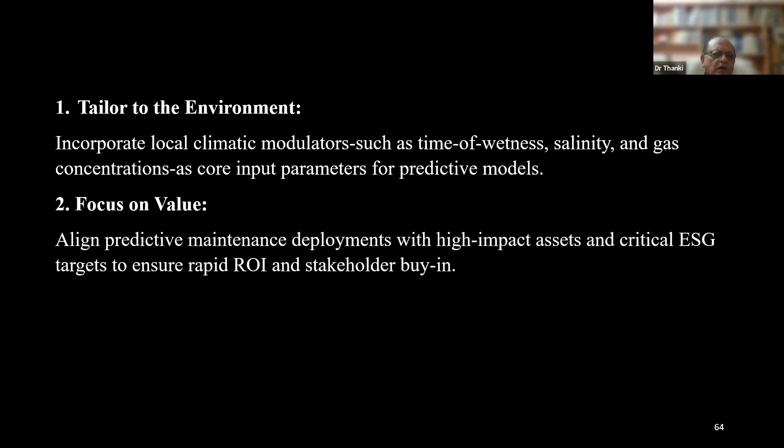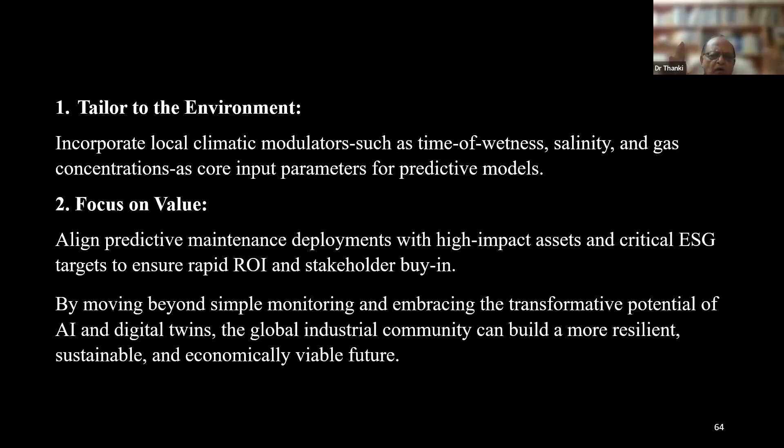Focus on aligning predictive maintenance deployment with high impact assets and critical ESG targets to ensure rapid ROI and stakeholder buy-in. By moving beyond simple monitoring and embracing the transformative potential of AI and digital twins, the global industrial community can build a more resilient, sustainable, and economically viable future.

We have spent decades being one step behind rust and corrosion, but today the game changes. With AI, we finally have the crystal ball for asset health. It's time to trade manual guesswork for digital certainty. Thank you for joining us on this journey to predictive resilience, where we keep our plants running, our people safe, and our planet proactive.